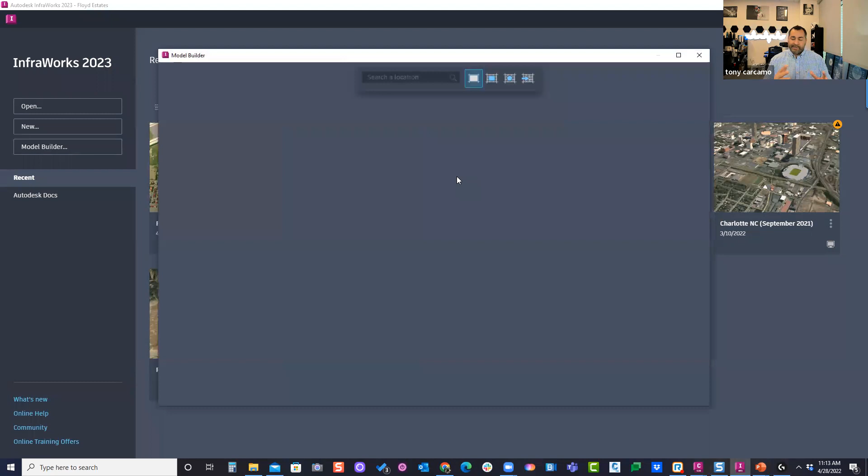Just to make sure. So if I was going to work on this project, I would go to Model Builder and find my property, zoom into it, select the area and give it a name, then download it. After about 5 minutes, depending on how big the model is and how big of a selection you made, it could take a minute or it could take 5 minutes.

So I've already downloaded the location of this preliminary site plan. Here it is, this is the location. I'm going to do some basic design.

Now some people are probably asking, where does the data from InfraWorks come from? For the elevation, that actually comes from the National Elevation Data Set, that's NED. If you go to the InfraWorks help menu and type in about InfraWorks Modeler, it will tell you where that data is.

Imagery comes from Microsoft Bing Maps. And then the road and highway comes from OpenStreetMaps. The buildings also come from OpenStreetMaps.

Now you can go into your Esri account and link in there and grab some free data from Esri and bring it into InfraWorks also. So if you have an account, I highly encourage you to go set up an account with Esri, and you can use that integration tool to bring in other data right into InfraWorks.

So if I was going to work on this project, I would come in here, download the model. That's all I need to do. Then I need to close the model to bring in the surface. So I'm going to bring in the surface first, so I'm going to close it.

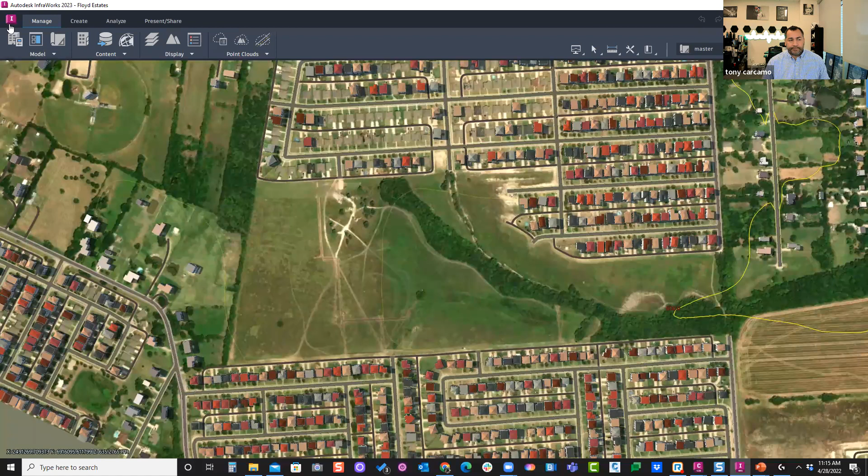Because you need to actually close InfraWorks to bring it into Civil 3D. So here's my model. I'm now going to go into Civil 3D and go into my Insert tab and say Open InfraWorks Model.

And now I'm going to browse to that SQLite file. So if I go browse to that file that it created, here it is. It actually puts it into a folder called Autodesk 360. There it is, I'm going to click on it and say Open.

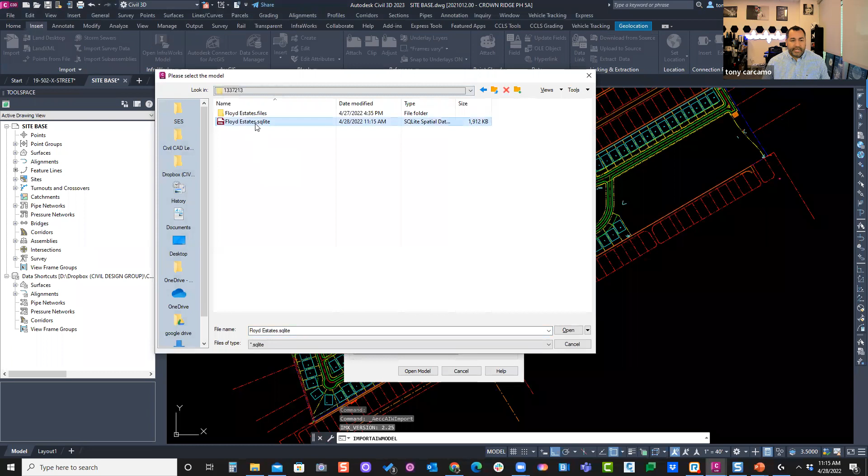Now, I've already assigned a coordinate system into my Civil 3D model, and I've also assigned a coordinate system into my InfraWorks model already. I'm kind of matching those together.

Now, at the bottom, you can select what you want to bring into this site plan. So if I click on the Refine Selection Set, it can look at that SQLite and see what it's going to bring in, and I can have a little checkbox. This usually takes about 30 seconds to open. I don't know if it does any faster on anybody else's computer, but here we go.

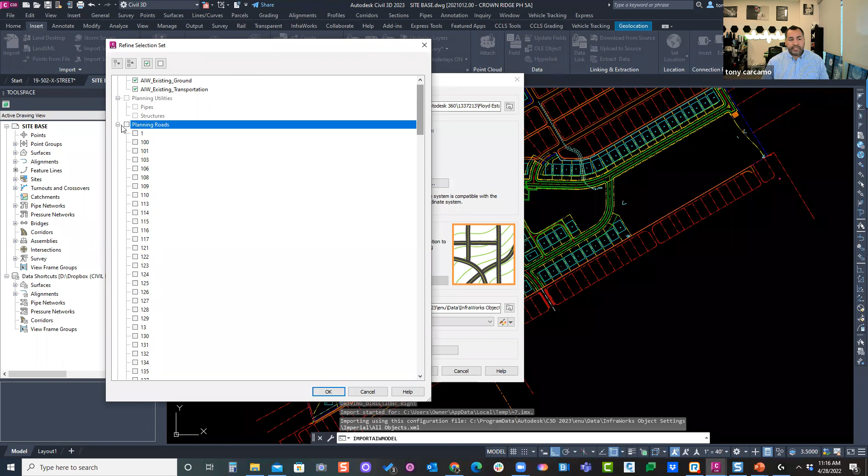This is what it sees in that InfraWorks model. It actually sees two surfaces, the natural terrain and the road surface for those planning roads, basically the simple concept roads, and here they are. I don't want the roads, I just want the surfaces. Okay, and I'm going to click OK.

And I'm just going to bring that in, it's an open model. And here we go. Now it's using the default surface style when it brings it in.

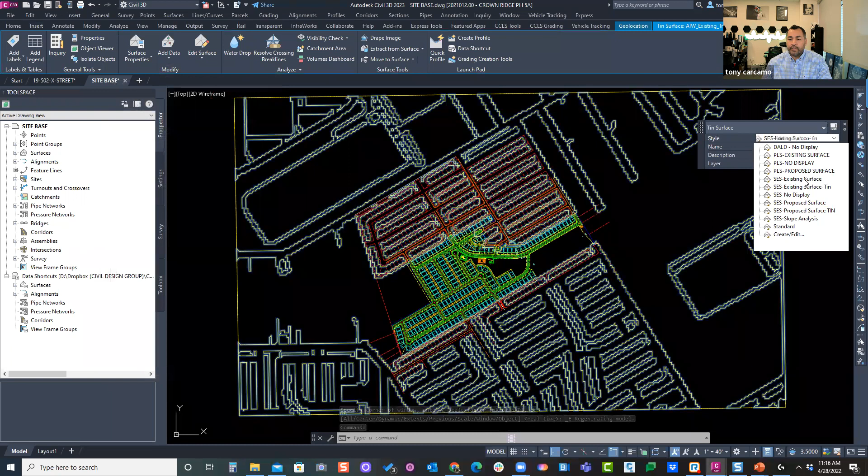So I'm going to click on this style and go to, using my quick properties, and say okay, this is going to be my existing surface. And then for the roads, there's also one right here, as you can see, there is the road.

So I'm going to go into my tool space and create a new surface real quick. I'm going to combine the two. So create, let's say, a GIS EG. Okay, and I'm going to assign the style for this.

So, existing. I'm going to turn off those two surfaces that came in from InfraWorks. I'm going to turn those off, I don't really need to see them because I'm going to combine them to no display. Also to no display, this is the road one.

Then I'm going to go into my EG, that GIS EG surface I just created, and paste those together. I'm going to paste the natural ground first, and then paste in my road. So here we go.

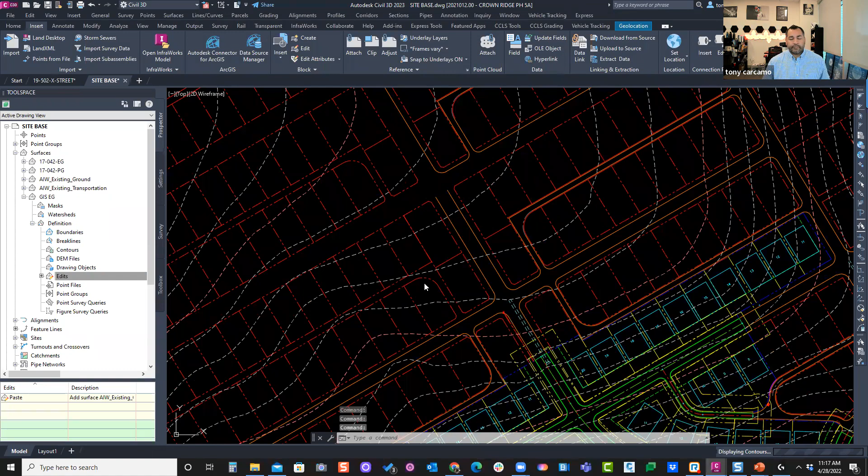And now we have our surface in here. So that's one very simple tip. If you're waiting for your survey and you need to start doing some drainage analysis, go into InfraWorks and download that terrain data and start analyzing your drainage, start doing some preliminary design.

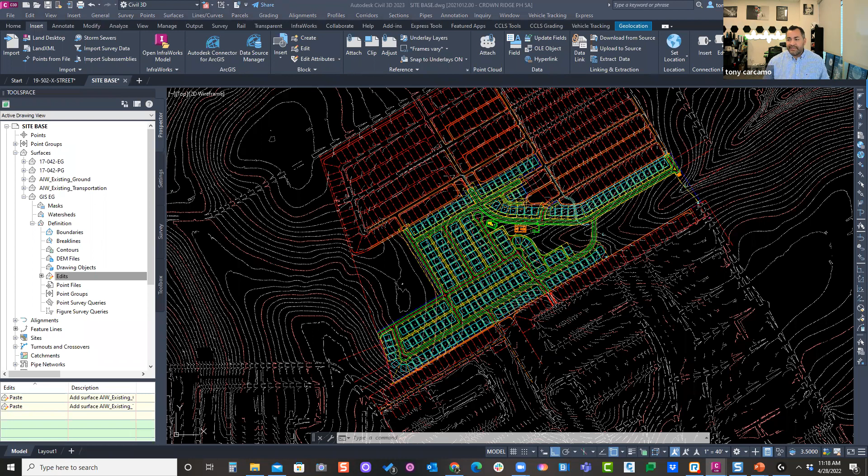I was just noticing Matt's comment. But I highly encourage you to use it. I've been telling everybody I teach that, hey, if you aren't using InfraWorks, use it for this one simple step. It actually will save you time. So now you don't have to wait for that drawing.

I think this model surface that comes from InfraWorks is actually better than the USGS maps you get from the website. I love the way it separates things—maybe you just want the road surface. I do like that it comes in smooth; the contours don't look jagged. It's very smooth—see the road? You can tell if the road is flat or even crowned when it brings it in. That's one of the pluses I really like with InfraWorks.

Now let's talk about roads. Let me close this, actually turn this to no display. Let's say I've laid out some simple road center lines here—this is my basic concept of my roads. I already have some alignments in here. I've got 2 alignments, actually 3 alignments. Where's the other one? Right here.

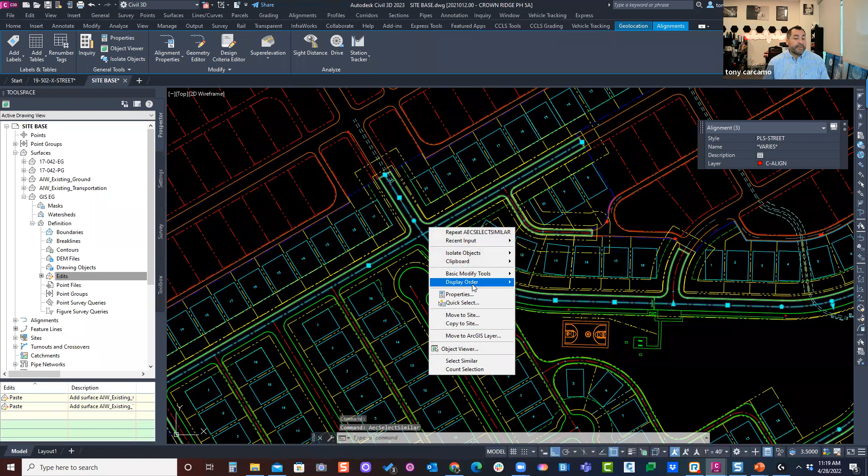Okay, so I'm going to show you 3 different methods you can bring that road into InfraWorks. One method is to import the AutoCAD Civil 3D file, so it recognizes the alignments and we put in a component road. Or I can take this polyline representing the center of my road, select similar, move it to back, and do the map export command. I'm going to show you the differences.

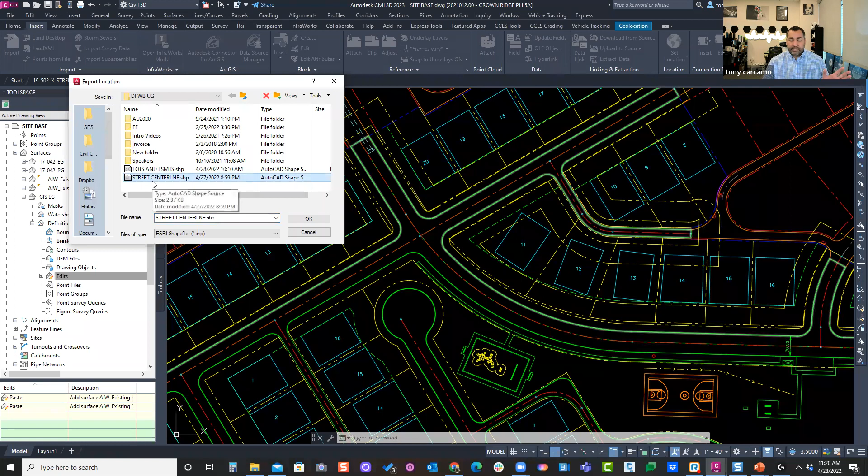Sorry, it kind of froze up there. Map export—if I select, I'm going to create a new one, and let's say it's a shape file, and we'll call it street center line. I've got one created already to save time. It's basically the polylines representing the center of my road—I've got 3 of them: one coming down, one coming across, and one across the top. I also created an SDF file, and we're going to compare what that looks like in InfraWorks.

So I'm going to bring InfraWorks back up—let me reopen it. And while this is opening, I'm going to create different proposals, that way I'm not manipulating the existing conditions of the model. All right, so up top is your proposals.

I can click on the pull-down and say add. I'm going to call this site plan 1, and I'll create another one—we'll say site plan 2, and maybe one more, site plan 3. I'm going to switch this back over to site plan 1, and bring in that shape file of the roads. Let's see what happens when we bring that in.

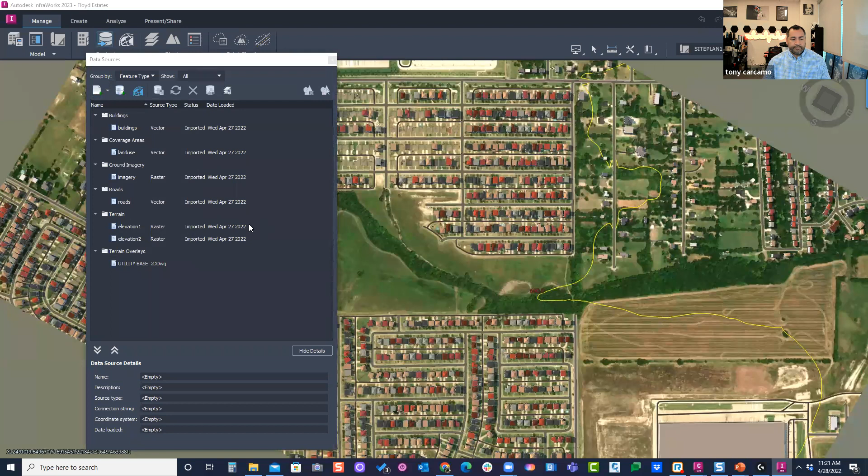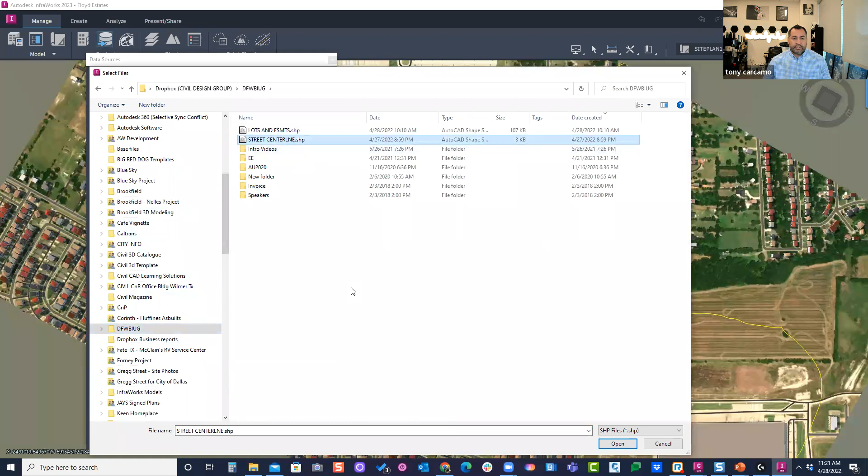I'm going to go into my data sources panel, and under the import tool, I'm going to say shape, then browse to the file I already exported. I think I put it here—there we go, street center lines. I'm going to say open. I need to configure this data.

So I'll double click here to configure, then go to the style and say this is going to be a road. What style do I want to use? I'll use this street with sidewalks for now. Click OK. Then I notice it already recognizes a coordinate system. I do want to drape this over the existing terrain for now. Let's say close and refresh.

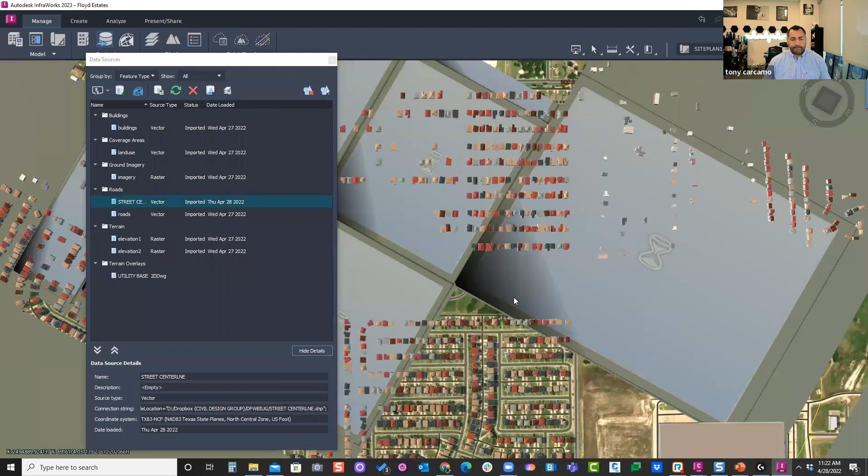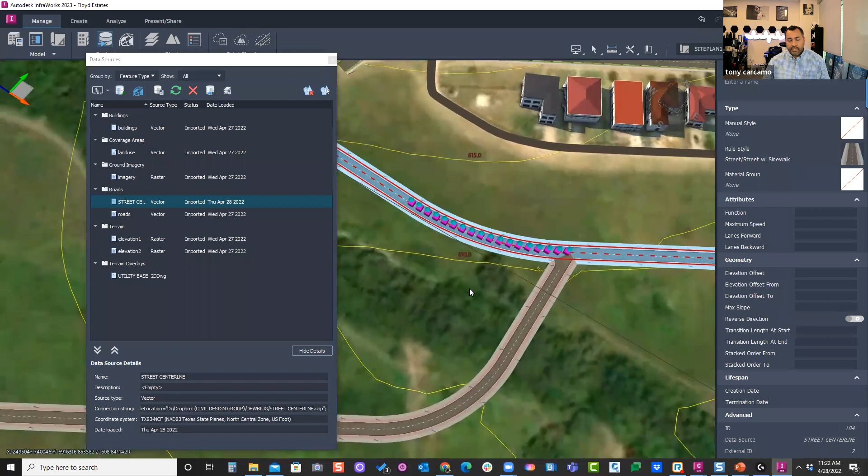As you can see, it built this planning road—these are planning roads, not component roads. Everywhere there's a curve you see all these little vertices, something I don't want. So how do you get rid of it? You want to convert it into a component road, and you'll get rid of all those little vertices. So that's one example of how to bring in the roads.

Let's look at the other method. So if we go change our proposal—same thing, if I go back into my data sources and go to the pull-down, we can also do an IMX file, a land XML file, or an SDF file. Let's go look at the SDF file—I think I've created one already. No, it looks like I didn't create one, but I'll go ahead and do the Civil 3D one.

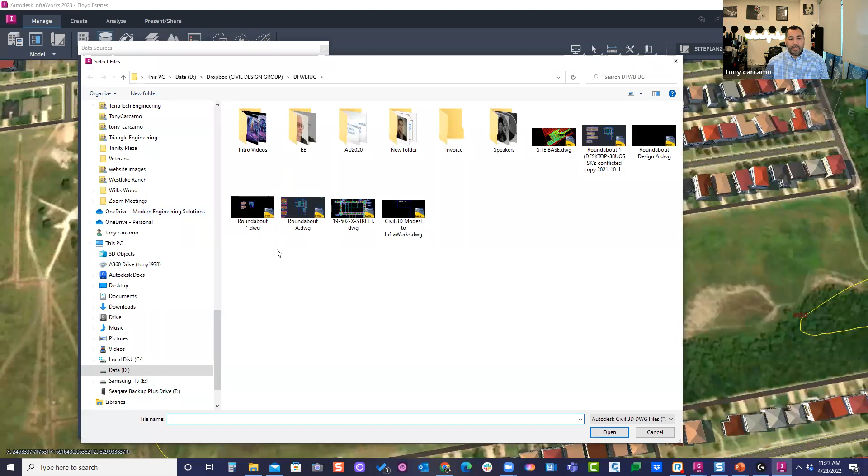So I'm going to import the Civil 3D model and hopefully it'll recognize our alignments already built into our Civil 3D model. If I go back into my pull-down and say Autodesk Civil 3D DWG—if there's alignments, corridors, pipe networks, smart objects, it's going to recognize some of those objects and bring it in, converting it into InfraWorks. So I'm going to go into Autodesk Civil 3D DWG and point to my file. Let's see here.

File we're using. Okay, where did I put it? Oh, this one. Okay, open.

All right, so this is what it sees. It does recognize surfaces in the drawing. This was actually a survey surface and this was proposed. I'm going to uncheck this. All I care about is that alignment.

So it sees it as a road. We can turn it into roads here for those 3 alignments. I'm going to click OK. I'm now going to configure it by double clicking on it.

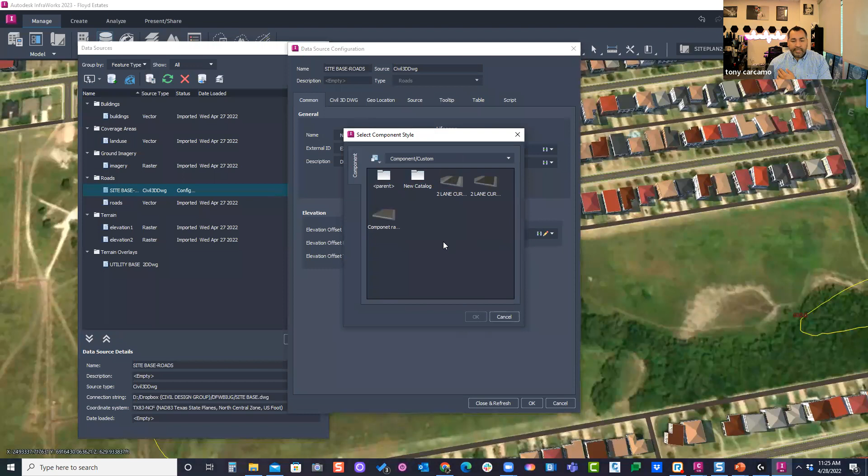In here, I can assign the style that I want for this component road that's going to bring it in. Click on the style. And here we go. I actually created one called 2 lanes, but I can go into assemblies and select one from the preset styles in here if I wanted to. So there's a 2 lane here. Let's see the custom one that I created, 2 lanes with curb, I think.

Let's see if we can make this bigger, large icon, that way you can see the actual part. 2 lanes with curb, we'll use that one. And then we're going to actually go into drape this into our terrain image, and say close and refresh.

So here we go. As you can see, we now have component roads that have been brought in. I can change the parameters of my radiuses for my turns, or I can change the intersection, say, hey, this can be a tractor trailer coming across through here, so it'll make the radius bigger. I can add some bridges in here.

So if I come in here and say, okay, this is going to be now 40. Okay.

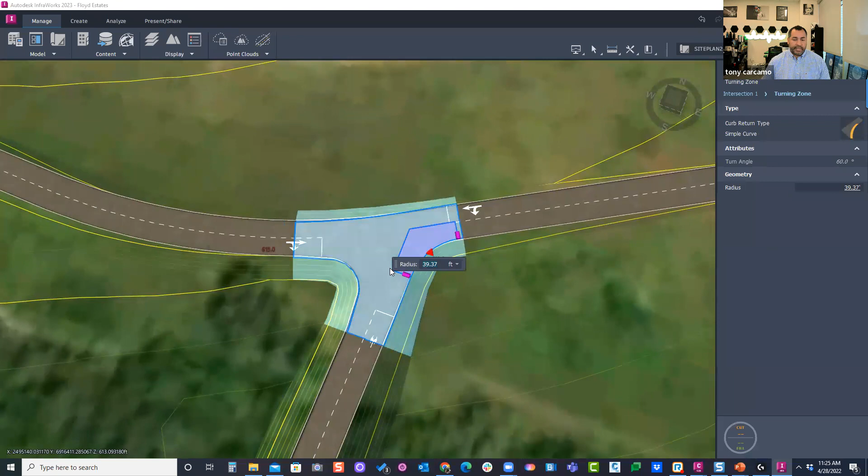I can now come in here and do a profile, a quick profile design. So if I say show profile, show design speeds, and show profile.

And if I go into my settings here, say, okay, show existing ground, you can kind of see the ground here, but I could add a low point, say, add vertical curve at this location.

Put in here a low point so you can see it in the model. We'll put a curve here. There we go. All right, so I got a simple curve in here.

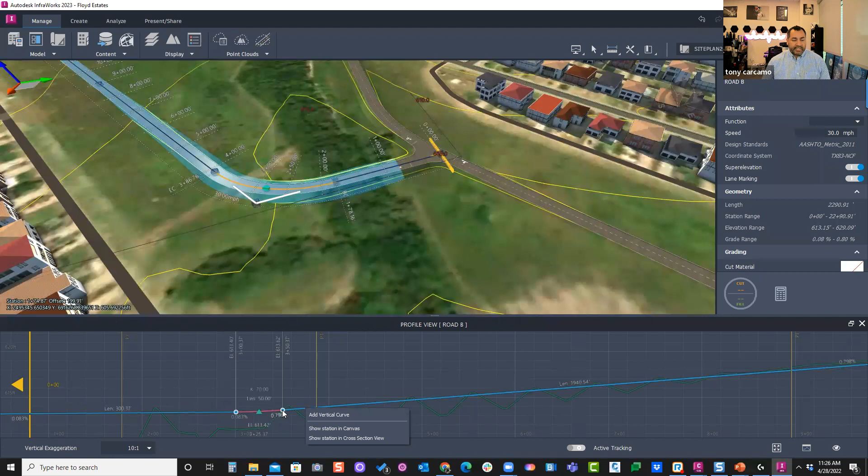I'm going to make it a little bit larger here. And I can also add a bridge, but let's actually raise this up a little bit.

Oh, where'd it go? You got to select your road, Tony. Yeah, sorry. Thought I had it selected already.

I'm going to raise this up actually now. And I'm going to put a bridge just for now to show you what that's going to look like when you bring it into Civil 3D.

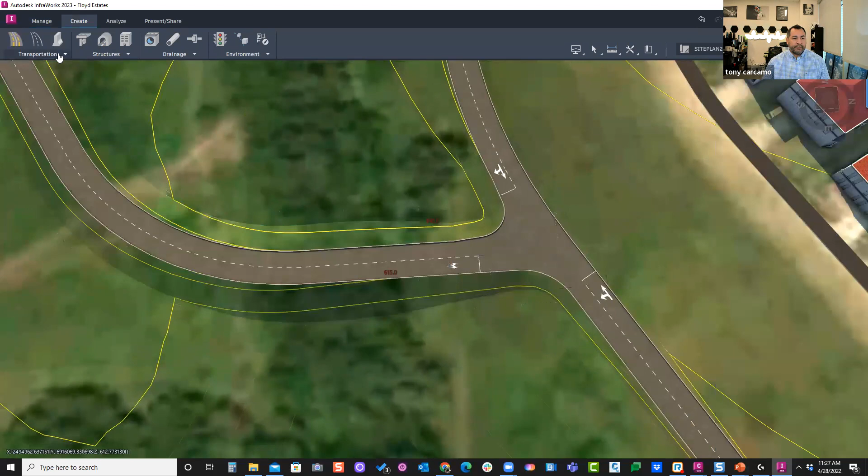All right, so I'm going to come in here, go to create, and say we're going to go to bridge, and we're going to select it. And we're going to start it from here and go across to here.

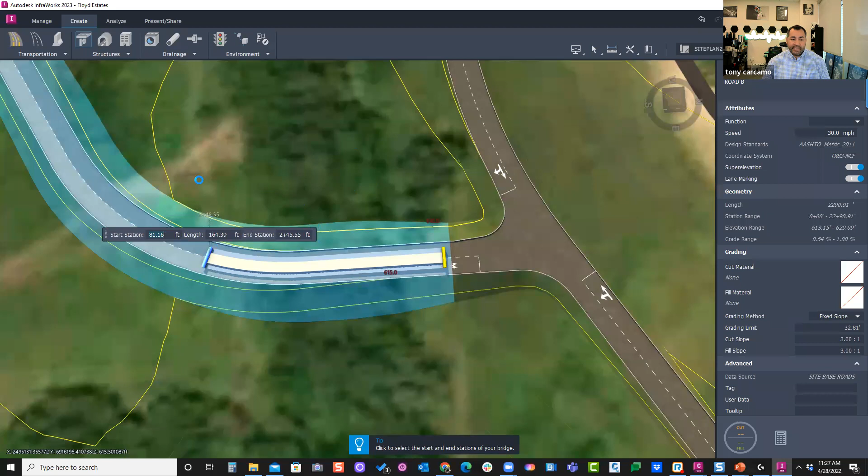Get a few seconds. Or more than a few seconds. And it typically doesn't take this long. Maybe I got too many things open. Well, it's faster than DOT though, to be honest.

Yeah. All right. So we do have a bridge now underneath here. We can change the actual parameters and assemblies here. Notice we have different types of bridge that we can switch out.

Now, you can take this information from, let's see here, let me, and go to publish. So you do publish civil and say create a new link.

What that's going to do is going to open up, correct me if I'm wrong Matt, take it straight to Revit. And then within Revit, the structural engineers can go and finalize design and then publish it and bring it back into InfraWorks.

So InfraWorks is more, the bridge is more of a preliminary design, but you would probably do more of your final design in Revit. So, but how would you do it?

Right here, this button here, create a new link. You can update it once they're done and bring it back and forth between Revit and InfraWorks.

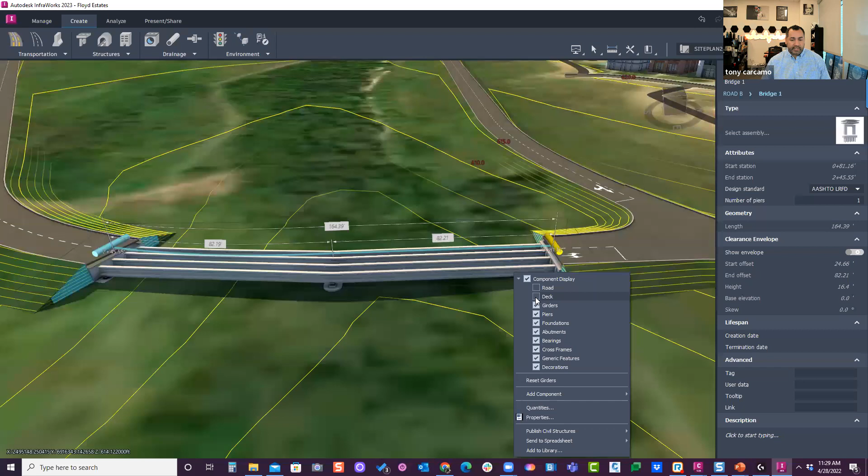So, all right. Now I can change what I want to see, these check boxes if I don't want to see the road or the deck or the piers. Now, if you want to see the piers, you can actually change your visual settings to engineering view. That way you can see through the ground.

All right. But let's bring now this into Civil 3D and see what that looks like. All right. What would this look like if we brought it into Civil 3D?

So I'm going to close our model. All right. And go back into our Civil 3D drawing. And we're going to bring it right into this drawing.

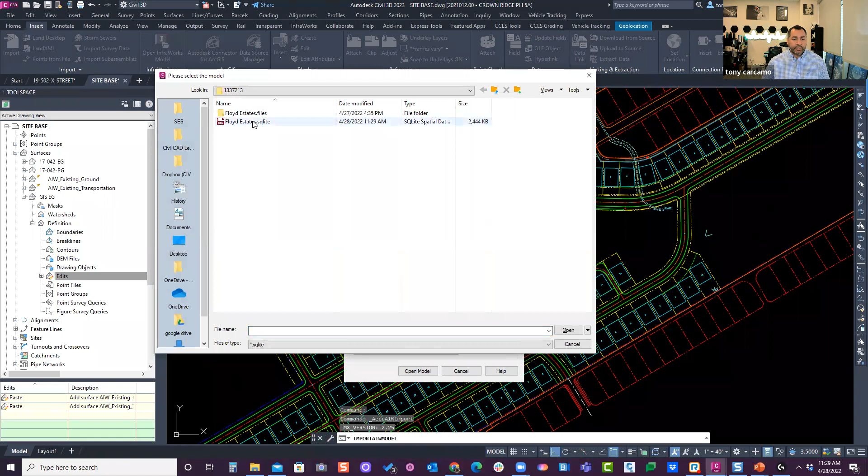We're going to go back into the insert and say open InfraWorks model. Click the SQLite file and say open. And now say, let's go click on the refine selection set.

Let's see what I have selected already. I do already have the two terrains, so maybe I don't want to bring that in. So that's why I clicked on it, because it's already in my model already.

Come on. You see it doesn't take this long. It's probably Zoom messing with your resources quite a bit. It's not that big of a file, so come on.

It's hit and miss. Sometimes this thing will open up this little dialog box within a couple seconds, and sometimes it takes longer.

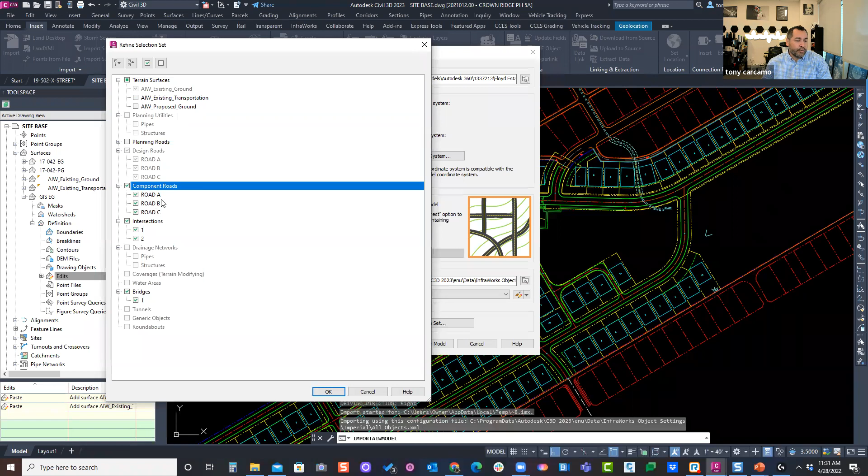All right, so you see these planning roads, that's everything outside my model, those actual surrounding roads. I don't want to bring all those surrounding roads in here. Here's my existing surface, I don't want that. But I do see the component roads here and the intersection, and then also the bridge. So I click OK and open model.

Now it'll convert those component roads into a corridor road. There you go, so here's the bridge.

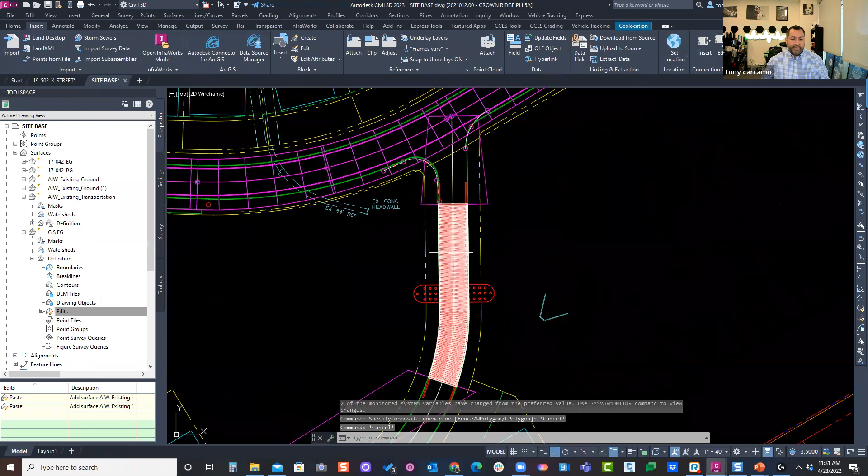As you can see here, if I click on this bridge, let's go look at everything here. Select similar, go to object viewer. There's the bridge that we just brought in, and then there's our corridor for our road that we built right here.

Now, it didn't do the intersection here. You need to build the intersection. I don't know if we could still do the intersection in InfraWorks or not. Correct me if I'm wrong, Matt. I don't think it can. Yeah, I don't believe so.

So you would have to split this up right here and rebuild the intersection. But if you do make some changes in this design, you can now bring it back into InfraWorks.

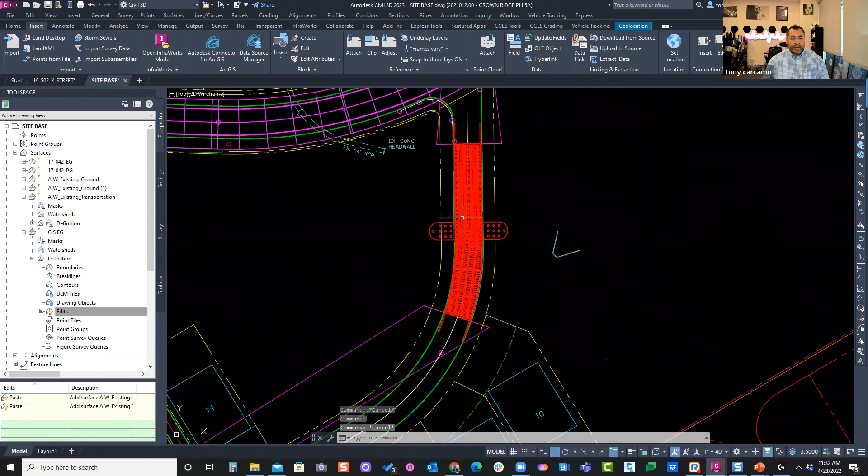All right, so this is now how do you put the actual bridge into a profile, Civil 3D profile? You can actually project the object, just like you're projecting a mailbox or a tree or a fire hydrant or a light pole. The same tools, you can project this into your profile.

Let's also go look at other tools now back in InfraWorks. Go back and open up InfraWorks.

Any questions so far? We do have just a general one from Victor. It's, does InfraWorks and Civil 3D 2023 run faster and better than 2022?

To me, it's about the same speed. I think I posted in my user group how long it took to open, but I haven't seen any really difference, honestly, in my end. Now, I can't speak for other types of projects, you know, airport projects, big highway projects, oil and gas. But I haven't seen any real difference, honestly. I think it's been about the same now.

I don't know of anybody else that's running 2023 right now. I've only experienced one crash in Civil 3D. I think it was more user error, I had too many drawings open, too many things going on. InfraWorks, I don't think I've yet ever experienced a lockup or a crash.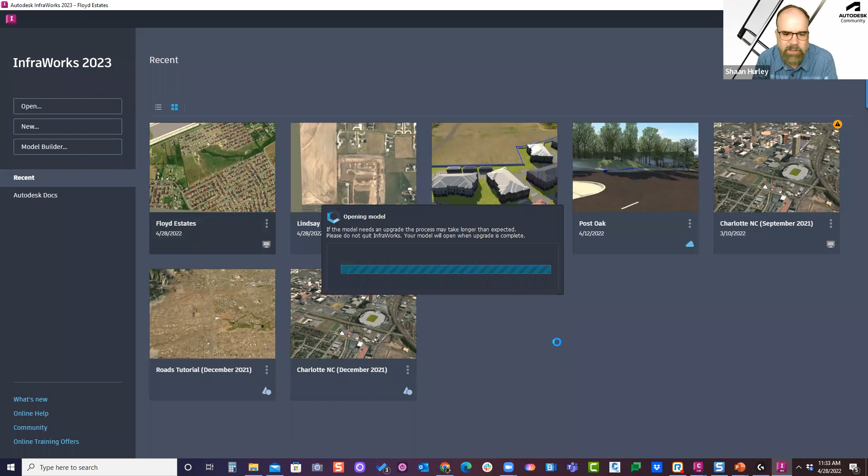I would think that graphics on large model graphics are faster. They did a whole bunch of work under the hood for that, and that would have been taken into Civil 3D. So I would imagine that's there. I don't know about InfraWorks. So, okay, yeah.

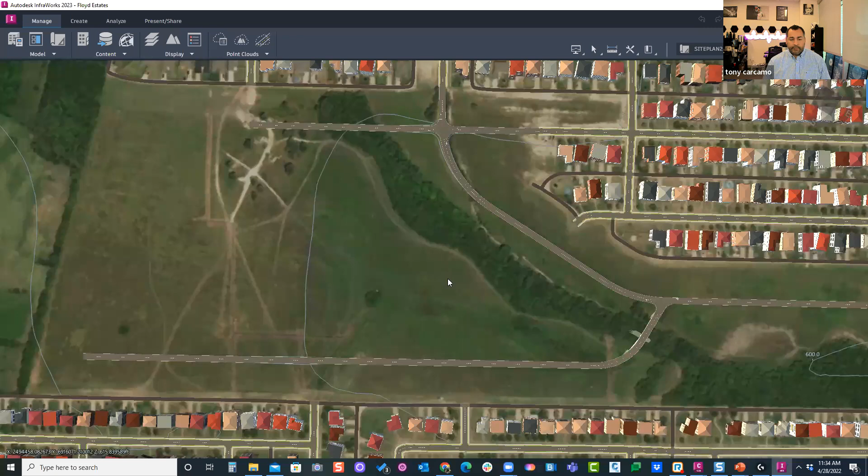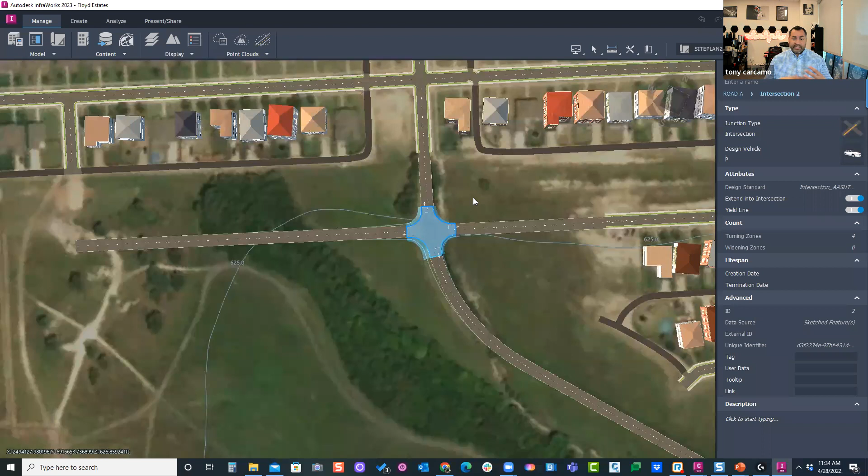Let's also look, let's see, go back into, let's do a drainage, actually a roundabout. Okay, so I'm going to convert this intersection into a roundabout. Now, yes, I can do it in Civil 3D by creating our profiles and using the roundabout tool in Civil 3D or the roundabout tool built into vehicle tracking. But if you want to play around the different versions of the roundabout, this is where I would do it. I would come in here and say, okay, I'm going to convert this into a roundabout.

So underneath our stack over here, we'll go into our junction type and select roundabout. And this is going to use the Federal Highway Administration Design Standards. And notice here from the list, we have a huge selection of different types of roundabouts. So here I can go back and say, okay, this could be a rural, it could be an urban concept, double lane.

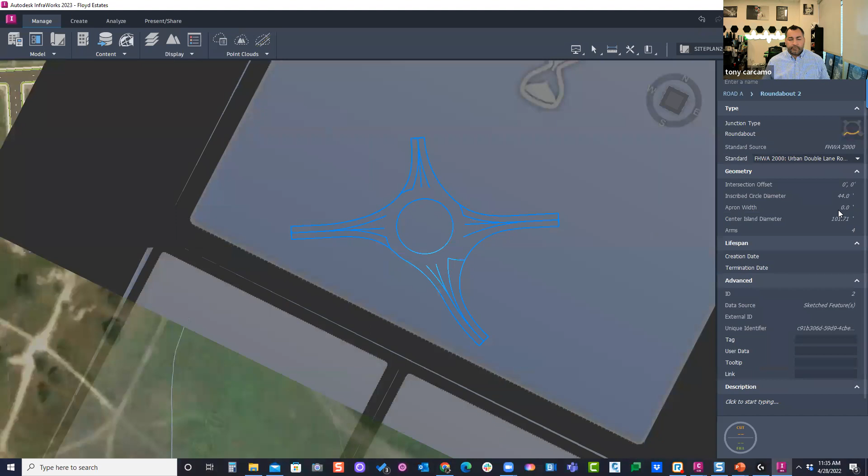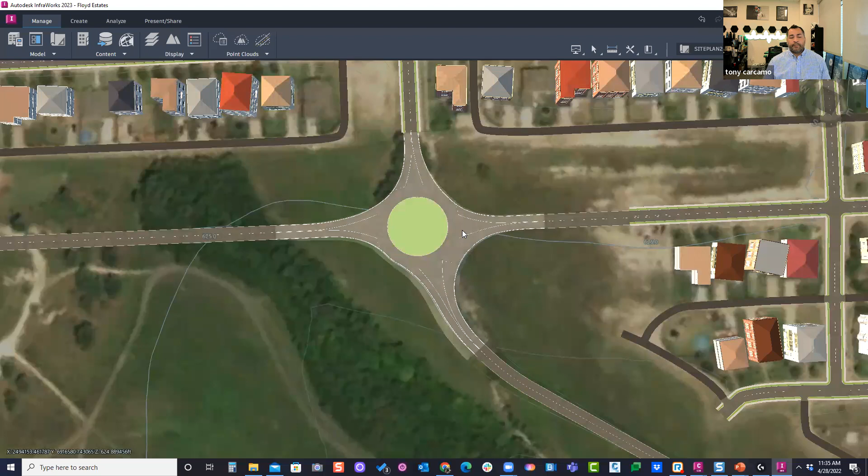You can change the interior dimensions of the roundabout. You can make it longer, but not shorter. It's not meant for a final design, though—it's more to get you started, and then you push into Civil 3D for the final design.

I love it because if I'm playing around with a design and a developer says, hey, can we fit this type of roundabout in this area? You can bring in some of the line work representing your right of way and easement, bring it right into InfraWorks as an SHP file to represent the line work, and start playing around with different versions of this roundabout. Very user friendly.

Come on, and change the parameters. Once you're done, we're going to close it out. I'll say I'm going to use this version here, this roundabout. Go in here, close this out, and come back to my Civil 3D file.

Let me delete what's already in here. Actually, let me just undo that. So when I brought this in... and open doesn't crash—there we go. Good. All right, so I'm going to bring in that roundabout and corridor into this model.

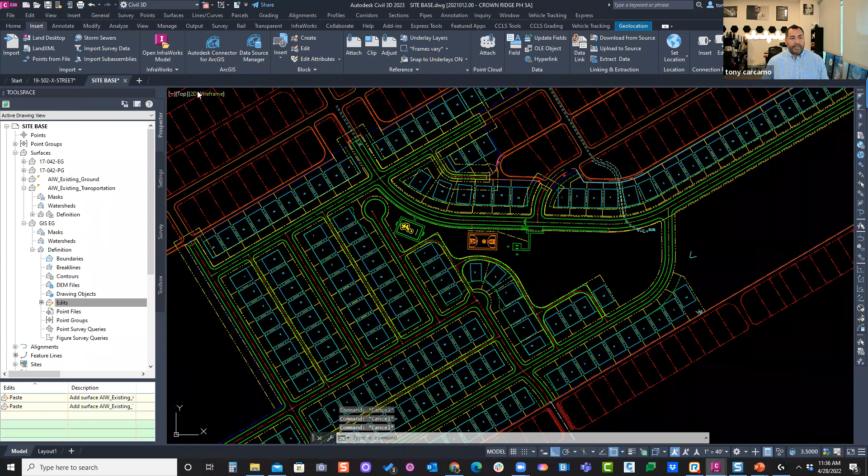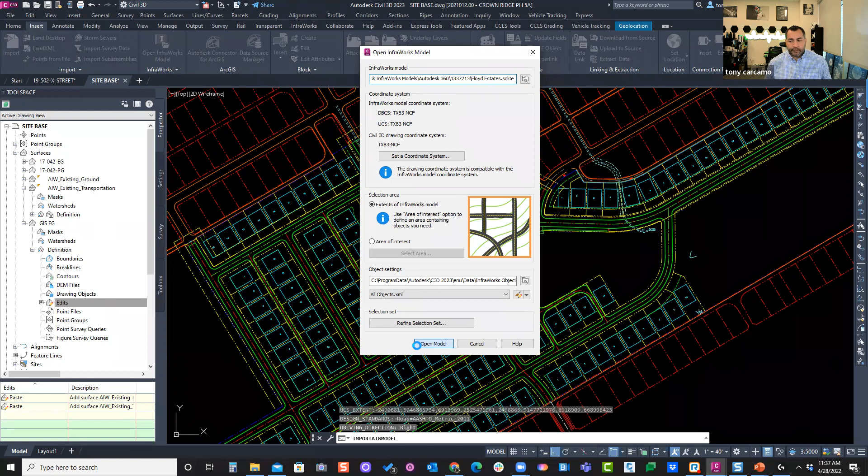Go back into my open InfraWorks model, browse to the SQLite file, and open the model. I think I got everything checked off—let me check. So we don't want any planned roads. Okay, let's just say open. Should take a few seconds. It did bring in those other surfaces.

Roundabouts are starting to get a little popular here in Dallas. I'm starting to see them every now and then—the last six years or so, we're starting to see some roundabout designs. Some of them call them traffic circles. I live in a town that's almost entirely roundabouts. Oh, really? The unfortunate thing is we get a lot of tourists too, and they have no idea what they're doing. So it's not the design, it's the actual user experience—do people know how to drive around it? If they don't, it defeats the purpose. You see people pull up and stop, put their blinkers on. Like, don't do that. Yep.

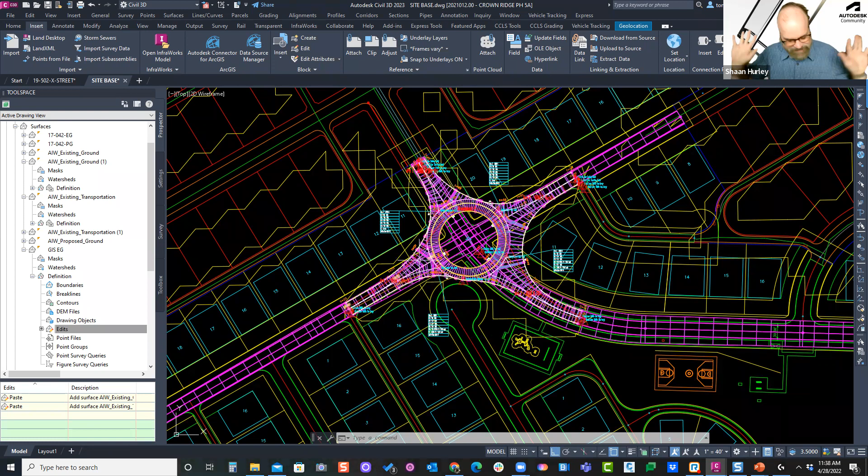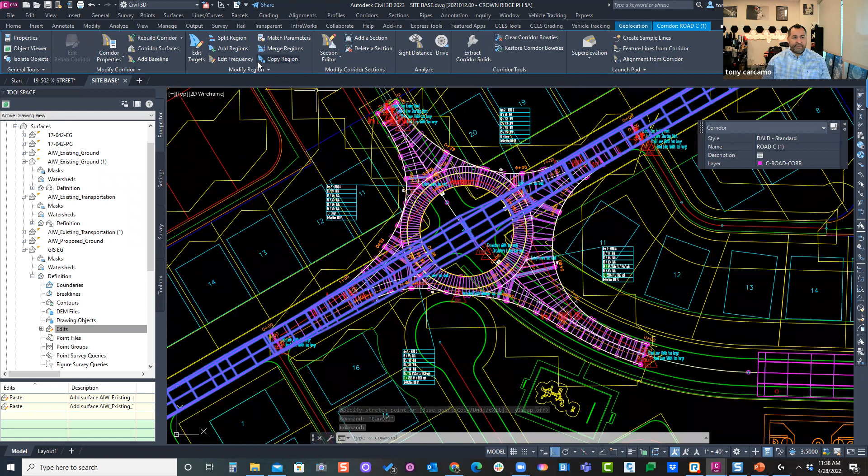Now notice here that it actually built this corridor across through the roundabout. I'm going to grab the grip and slide it back for this portion of the road, and the same thing here. I can split it or pull it back in here, and let's split the region here.

Come on, split region. Split region—there we go.

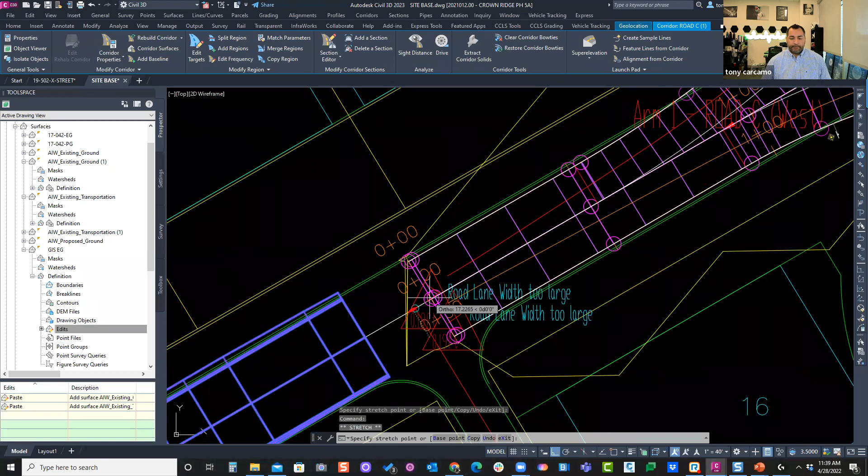I'm going to use this to slide this section back, and use this grip to slide this one back before the roundabout, where the roundabout actually ends, so you can come back and connect to it. But the beauty of this—look—it actually built the corridor in here.

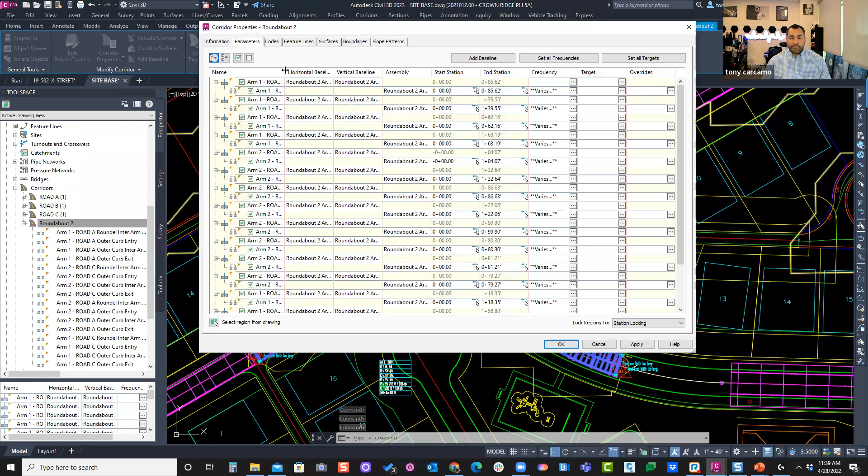And I can go into my roundabout editor and continue making edits to this roundabout. You can see if I go into my corridor properties, we have our corridors, and then there's our roundabout. If I go to properties, you'll see our roundabout tools, and you can continue making final revisions to the roundabout in here. So if you're playing around with ideas, I highly encourage going into InfraWorks, exporting just your center lines of your road, bringing it into InfraWorks, and then bringing it back into Civil 3D to do your final designs.

Really cool stuff. Okay, so let's talk about some of the pipe networks in there. Now, you can bring in pipe networks from InfraWorks into Civil 3D. You can use some of those Infrastructure Parts Editor parts and bring them right into Civil 3D, and you can also take it from Civil 3D into InfraWorks. So I'm going to show you how to design something in InfraWorks with pipe networks. I'm going to go back and open this up, and let's do some drainage analysis.

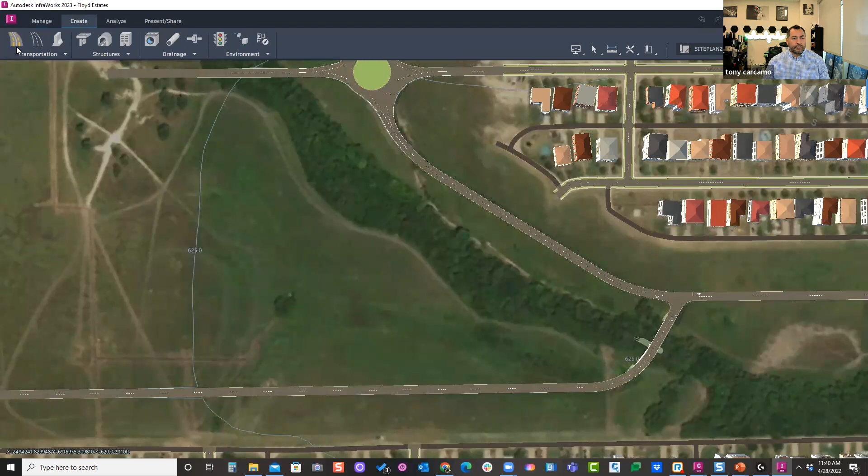All right, so I'm going to open up that model. All right, so we have our road here. I'm going to build another road quick—component road—and I'll say, what style do I want to use? Let's do this 2-lane component road and build it here, then connect it right there.

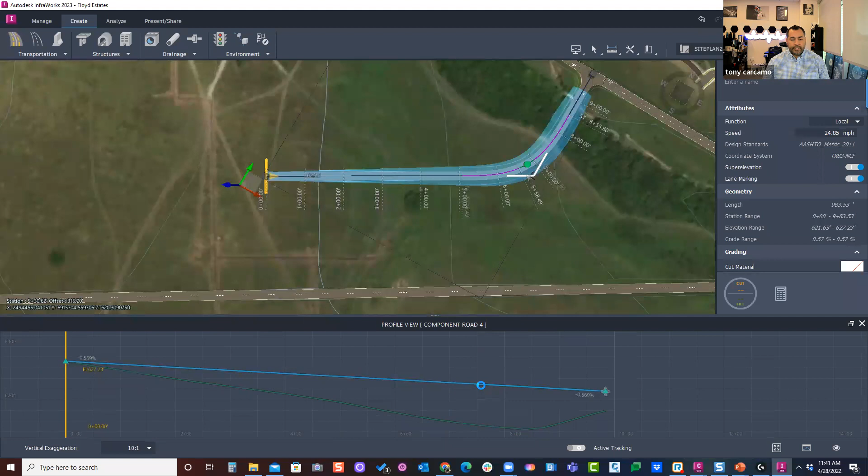Okay, let me look at the profile real quick for this road. I'm going to put a low point in here. Now let it regenerate. Okay.

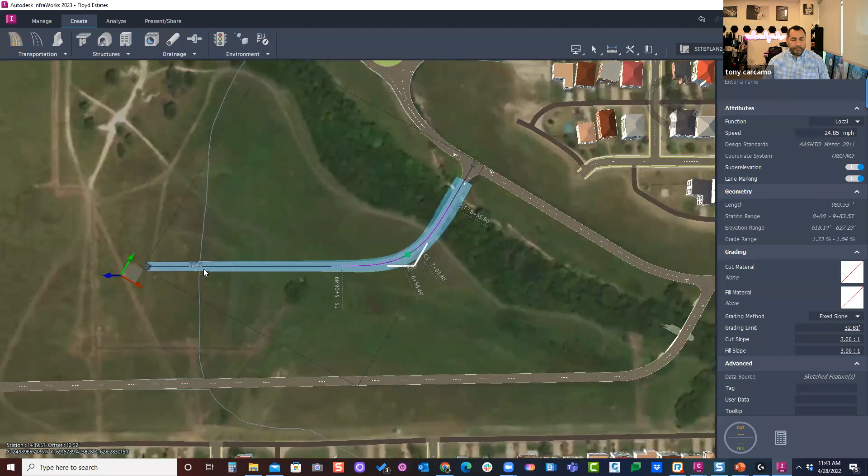All right, so now let's build a catchment area. The key is we want the software to recognize this component road, so that we can put some inlets in here. I'm going to go into Analyze, go into Watersheds, create a watershed—this uses credits, just to let everybody know. I'm going to put one right here, the low point through the creek.

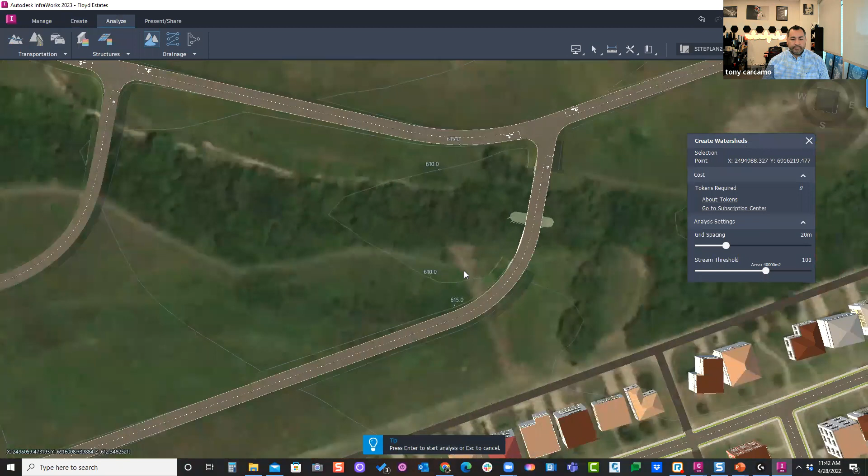Oh, don't do that, sorry about that—let's try that again. And then I'm going to actually lower my grid spacing to get a more accurate model, hit enter.

And come on, there we go. Now, sometimes it may error out. That's why you want to slide that grid spacing a little bit to a lower number.

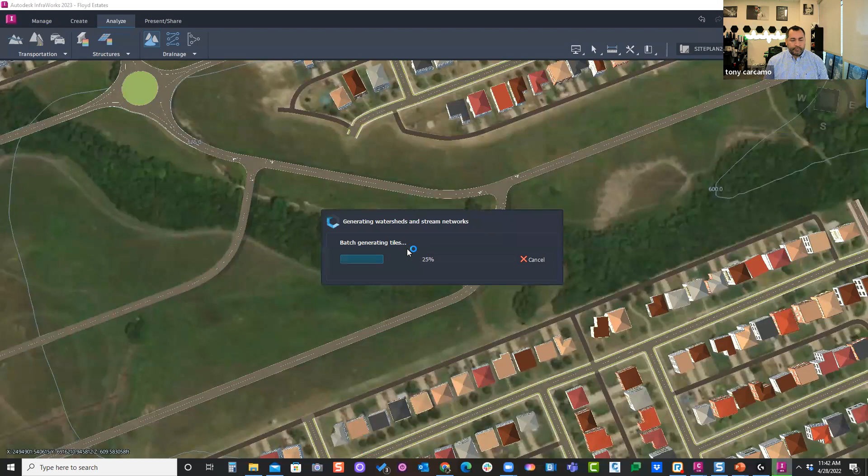Hey Tony, real quick - InfraWorks doesn't use credits for watershed analysis or profile optimizations anymore, right? No more? Okay, with the 23 version. Yeah, I don't think there's anything in there now that requires credits. Oh, that's good, that's really good for sure.

It's really good news. Okay, so I want to put some - where's my low point? I was really wanting a low point here in this profile. And I think I put it in the wrong spot. Well, let's see what it does.

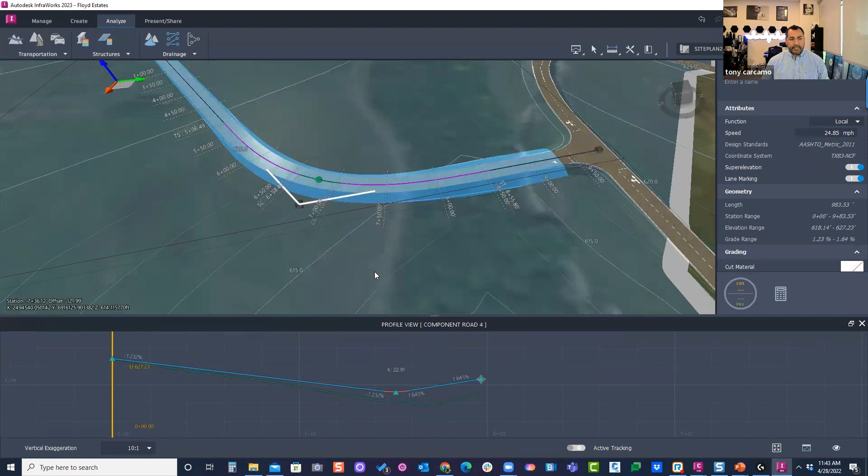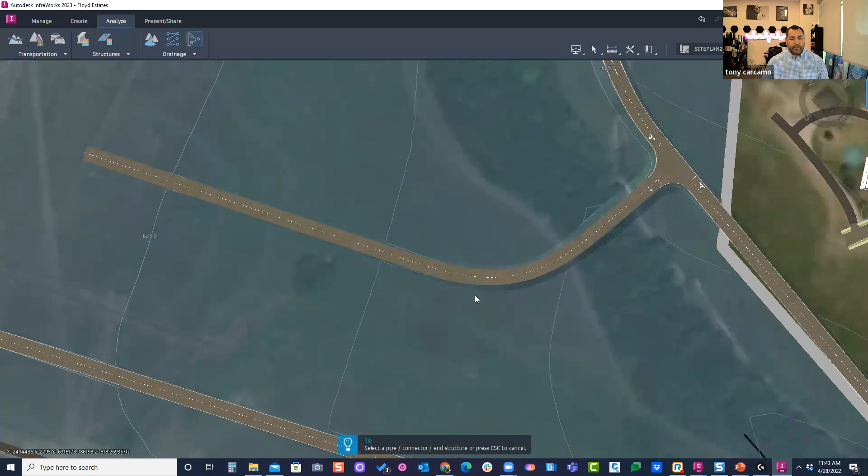We'll see what it does for our storm system. So I'm now going to click on this component road and say drainage, and say set - actually, no, we're going to go into size network, let's say size drainage network. Like pipe - oh, I need to create the pipe. I don't think it caught the road.

Let's see here. Add structure, let's see. Oh, here we go, sorry - that's what I meant to do here. Right click and say drainage, and say size drainage network.

And this is going to be based off your rainfall intensity. So you would actually - I'm going to size this for a 1 to 100 year flood study. But here's your rainfall intensity charts. You can actually create your own chart based on county or whatever regulations in here to do your hydraulics.

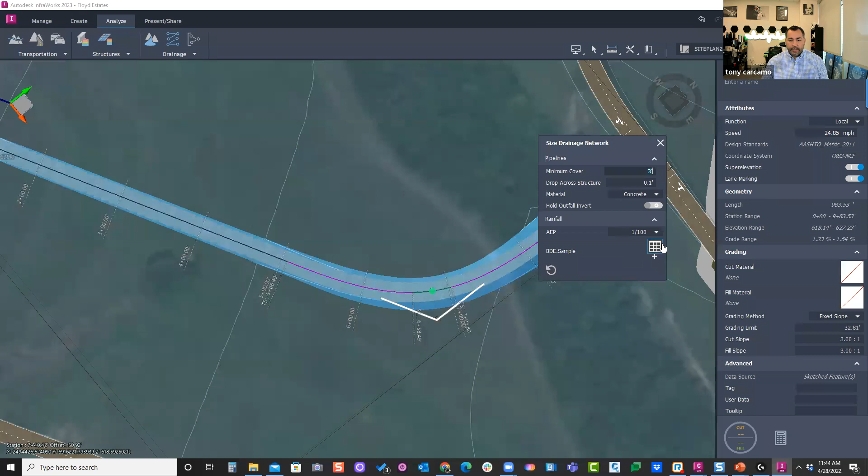Now here we can set the pipe coverage, the type of material of the pipe. So I'm going to click on use the defaults for now, and let's see if it actually builds something here. I don't know if it'll build because I don't think I had any low points on my road here.

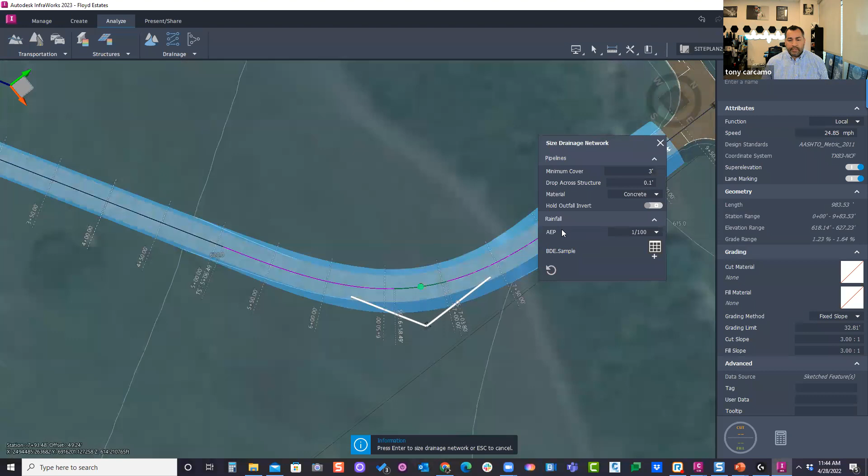Let's try this again. And size drainage network - and I don't think it did it because I didn't have any low points. That's in here. Let's see, did I save a drawing that had one already? Just a second.

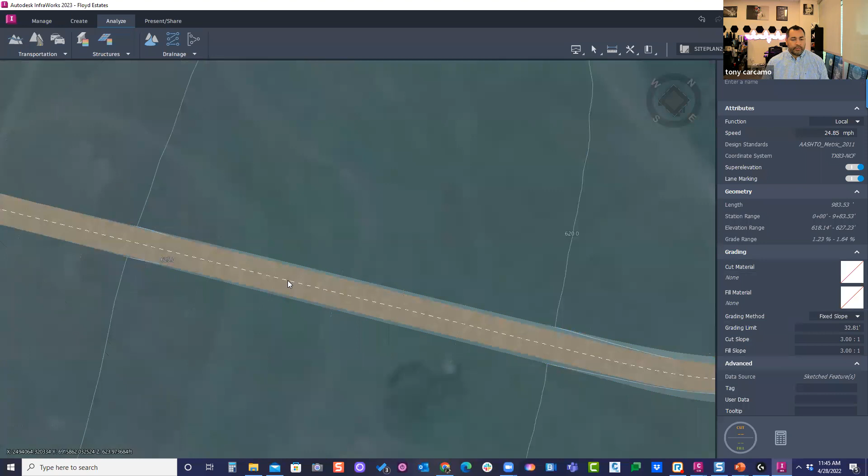It's at the other end. Let's try this again. Drainage. Okay, I'm going to come back to this, see why I didn't create my pipe networks.

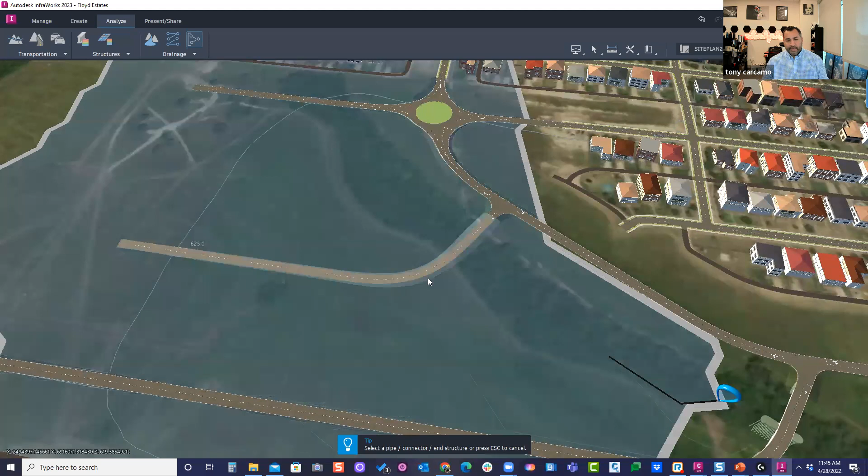But if you actually got your pipe network created, you can come back into Civil 3D. And when you bring it back in, if you want to use the parts that InfraWorks is using, you want to go back into your pipe network catalog and make sure you're using the generic, those new parts - generic drainage with pipe connections. That way it's taking advantage of those parts in there.

Now, I noticed when I brought it in, it defaulted to the standard pipe. So I actually had to switch the style to get the part to come in when I built it first time I brought it in. So just to let you know, sometimes it might use a default pipe style and you'll have to switch the pipe styles in there.

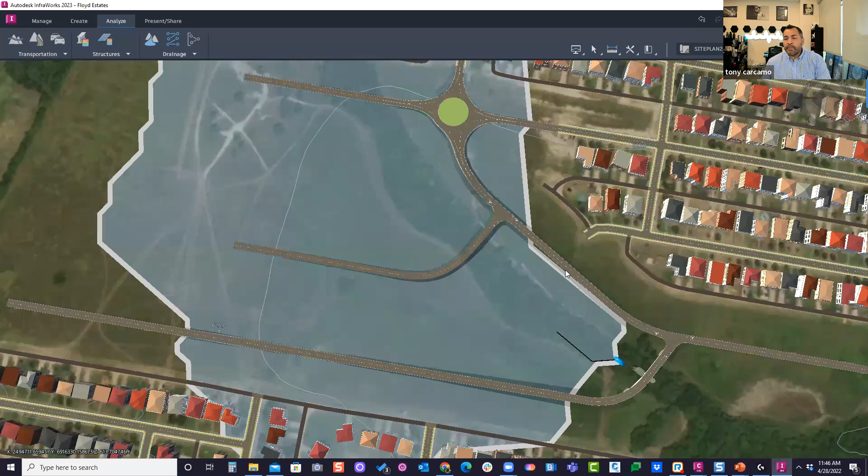Now you can also create generic pipes in InfraWorks. Let me show you real quick, and bring it into Civil 3D. Let me rotate my model - I think I'm upside down. And if I wanted to create my own...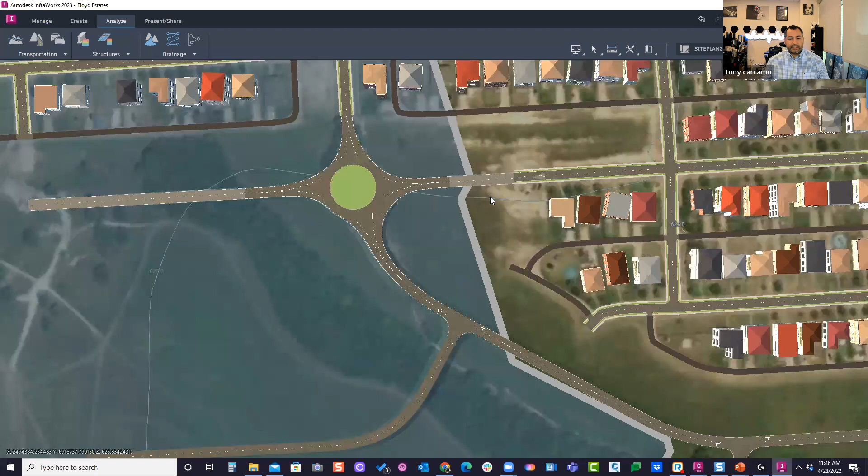Pipes in here, I can go into the create environment - actually here, drain, sorry, this is what I was looking for, sorry. The road. Drainage network. And blah, blah.

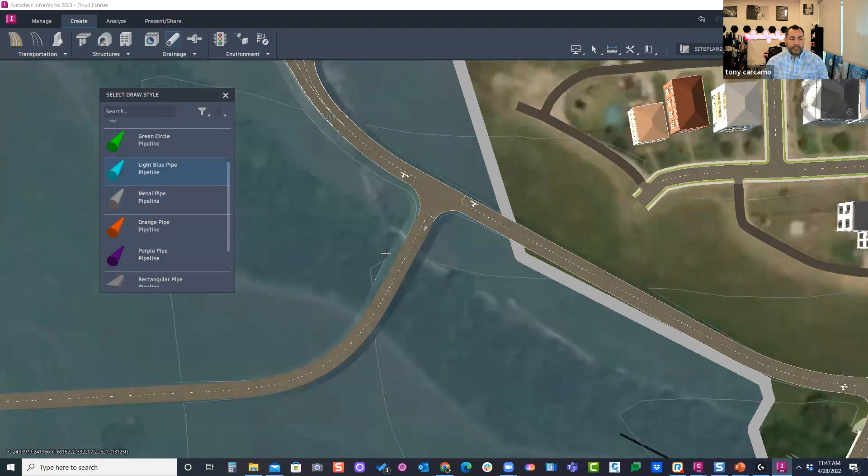Let's see if it'll build on this now. No, it's not what I'm - anyway, let me build my manual culverts. So pipes, I can select the certain pipe styles that I want, go into cyan and say okay, I'm going to build a pipe from here to here. And this would actually be a lot longer way to do it.

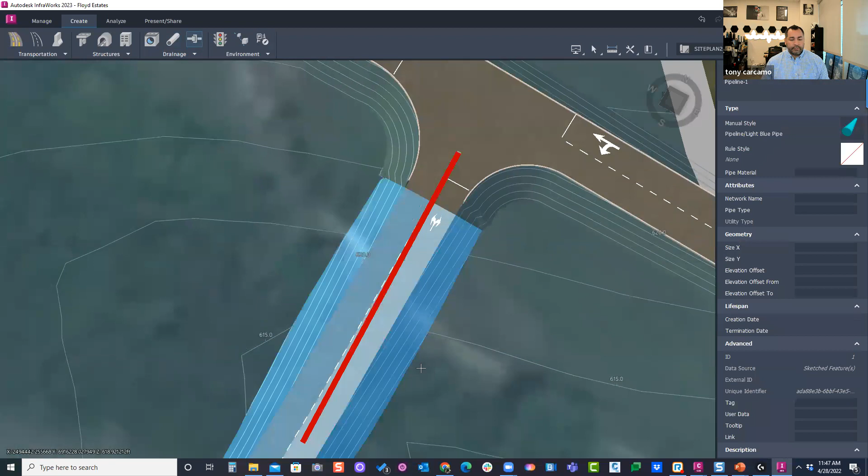I can go into my culverts now and say it's a pipe connector, and double click at the end point of this line to put a manhole here and here. Okay, I'm going to lower my pipe. So if I go into my properties - come on, there we go.

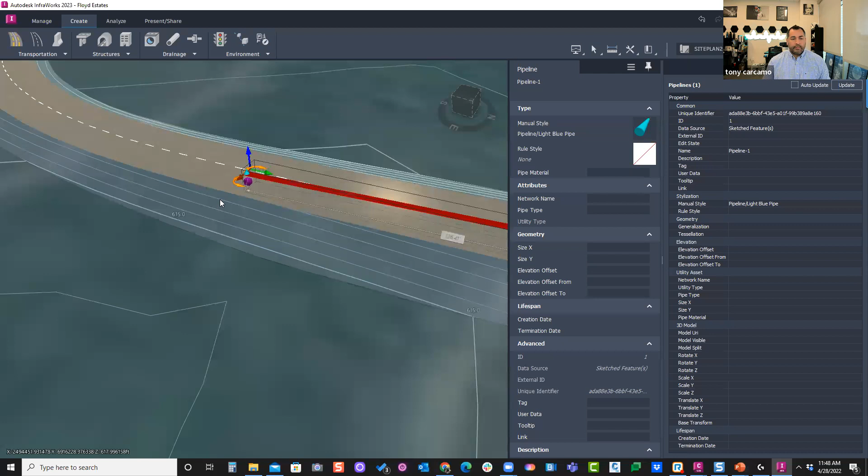The offset elevation, I can lower it or change it. So let's see if I can change the value at each end. So if I come in and say this is now 618, and then on the other end, 617.

Don't think this is connected - there it is, now it moved down. Okay, so let's say you laid all this out - you manually laid out these pipes in your drawing. It will now bring into Civil 3D. So let me close this.

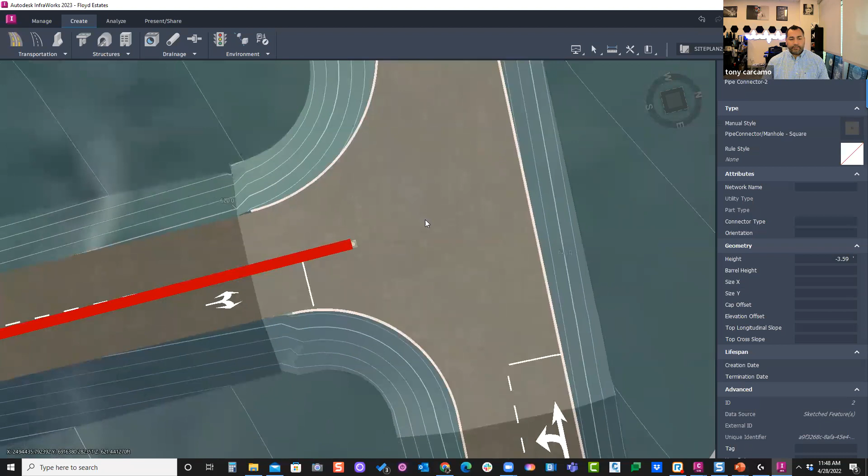Still kind of curious why this didn't build my drainage. I'll try it one more time. Drainage network - okay, blah, blah, blah. Parts, blah, blah, okay.

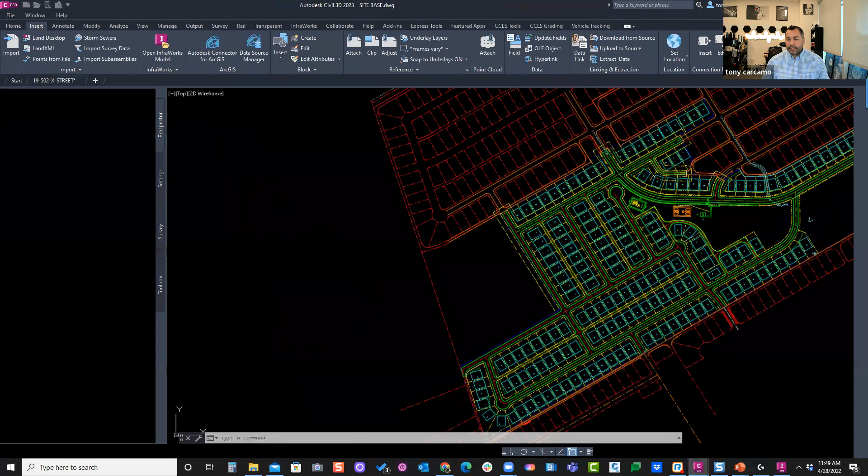Didn't want to build it, so let me close this and go back to Civil 3D to bring this in real quick. I'm going to close the file without saving and reopen it, pointing to my site base, then bring it right into Civil 3D. This will be the last step I show y'all.

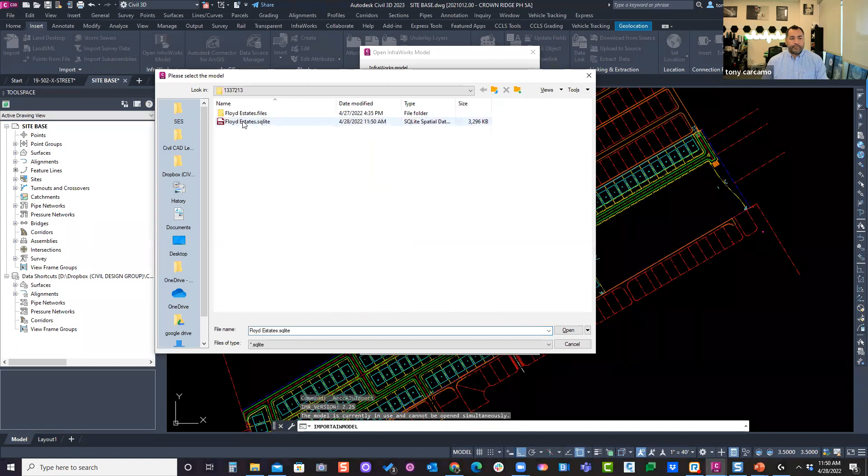Okay, and you still have the model open, yeah? Let's repoint to it. Open. This should go away, okay. Let me make sure my pipes are checked off. This will be the last thing I'll show y'all, since we're running out of time.

You can also take a corridor, like if you have a subdivision, and corridor the whole thing, then bring it right into InfraWorks. You can do that too, and it'll recognize it. So here you see those pipe connectors, and I actually saw that. I can bring it in here, and let's say open.

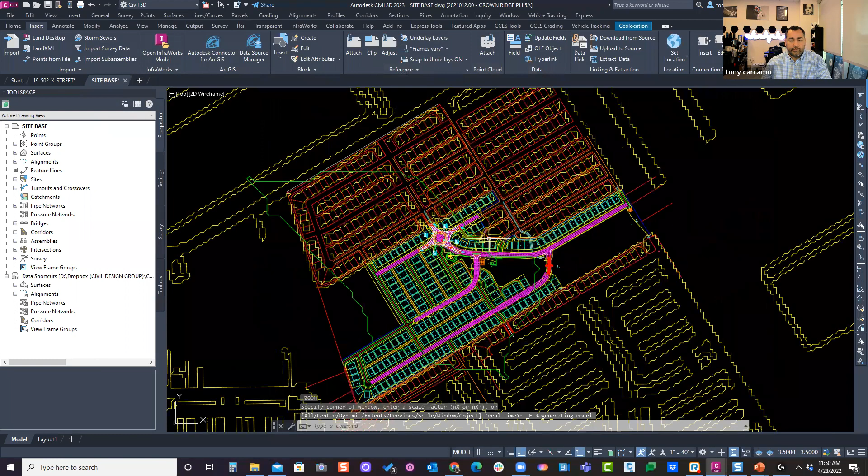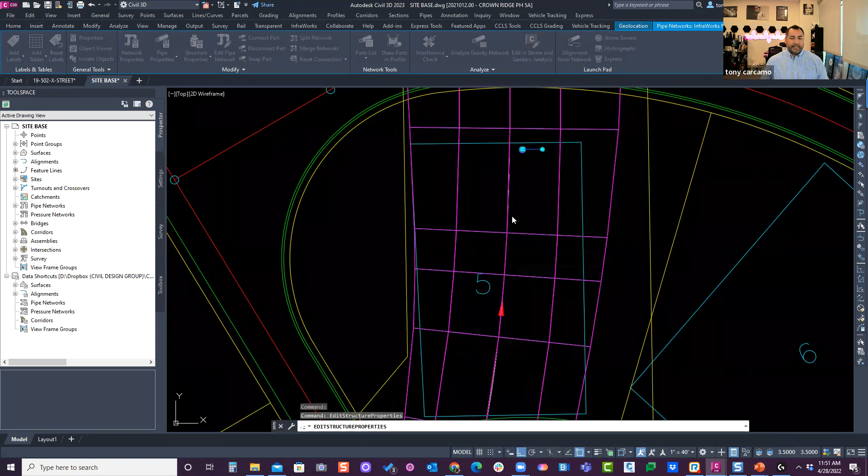Where did I draw all those pipes? Which road did I build it on? I forgot where I drew it. Was it on this road or this road? Oh, here we go, there it is. You can see the manhole, but I noticed the pipe is using a different style. That's why the pipe's not showing up, because it defaulted to another pipe style, but the structure is there. You can see this is the structure I drew in and built as a Civil 3D structure.

Object viewer. Okay, that's one method you can do. You can lay out manually, or you can have Civil 3D size the pipes for you in InfraWorks and create an outlet structure, doing some of the hydraulic information for you. Then you can spit it back into Civil 3D and maybe even use the analyze gravity network tool to double check it.

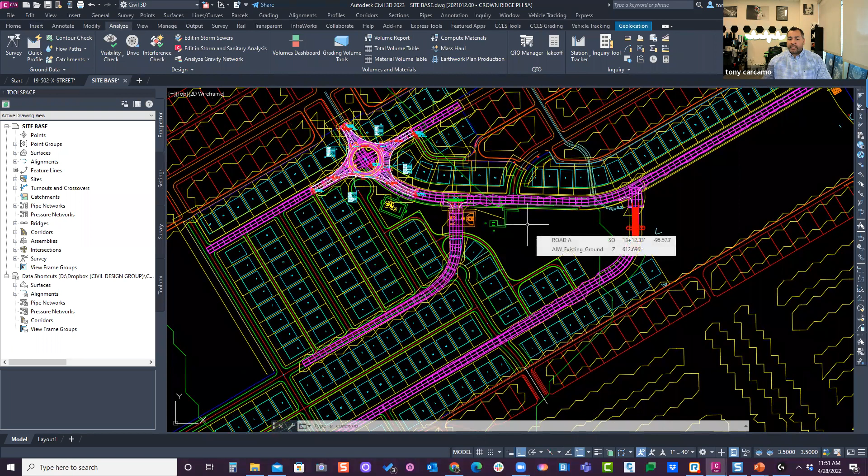So okay, I'll take the last questions. Sorry I couldn't go in depth, I just had to show some of the tools you can take back and forth with Civil 3D. So surfaces, corridors, pipe networks, the drainage pattern - here's the drainage watershed. I can turn that into a catchment or even a parcel to represent my drainage watershed patterns. So, questions so far?

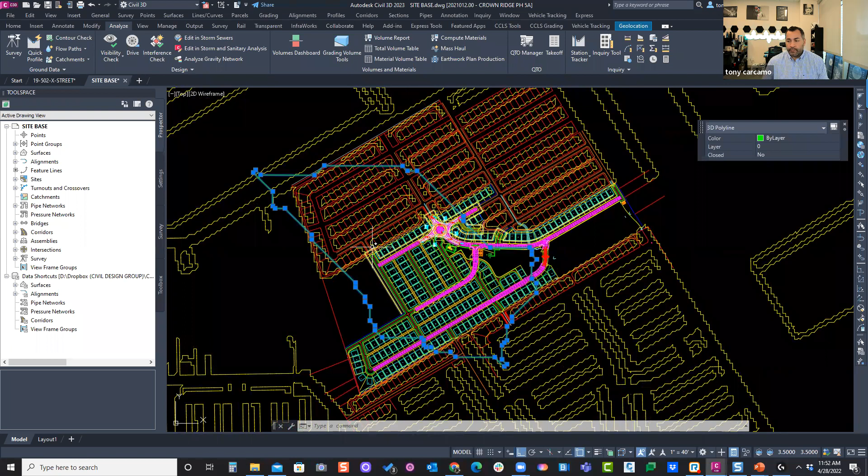Did you show the object settings? I don't know, sorry, we've got to really wrap up fast. Yeah, we've got another one right behind us and they're waiting right now. So sorry guys, the Dynamo guys can't wait.

So man, I appreciate it. Maybe I can come back and do a part 2 and get more in depth with y'all on some of these tools. I just want to give you a general idea of what you can do back and forth with Civil 3D, InfraWorks, and even Revit. That would be awesome. And yeah, Victor's saying he wants to see the cul-de-sac too. I can do a part 2 with the cul-de-sac. Yeah, I could probably make it work. Yeah, this is awesome.

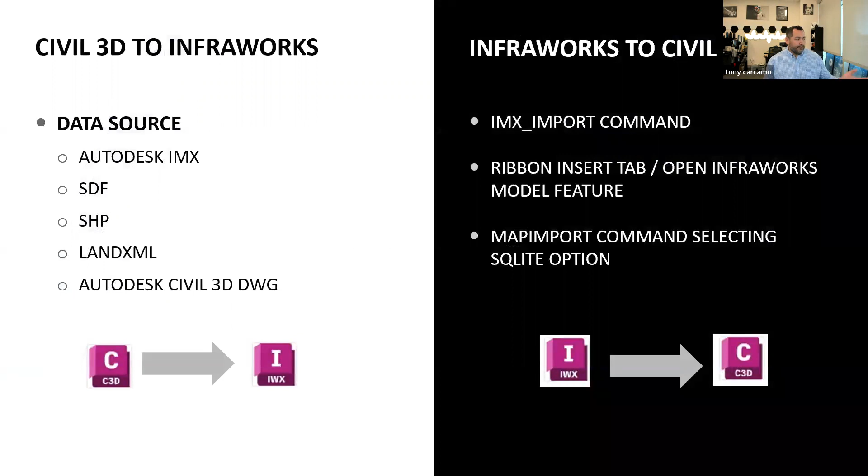I mean honestly, a lot of these technical topics, we can go a long time. Oh yeah, and this is different methods for how you can import some stuff there. I forgot to show you that slide, but right there - yeah, let's go to the next one.